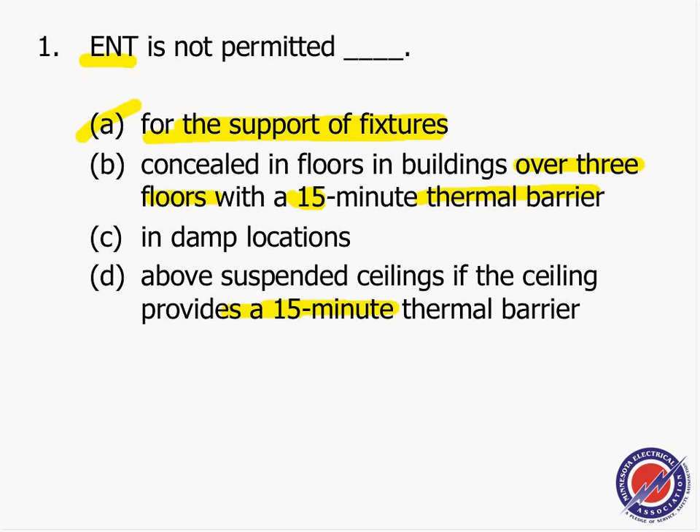ENT is not rated. Our answer for this one for support of fixture - it can't be supporting fixtures. You install it concealed over 3-story building, if you conceal it with a 15-minute thermal barrier in location above suspended ceiling with 15 minutes, everything is okay except you can't use it to support the fixture.

Stop me at any time if I'm going too fast. ENT is not permitted in theaters because it produces smoke if the system is medium voltage, and direct burial is not listed.

Moving on to the maximum number of bends in ENT - for all conduits, the maximum number of bends is 360. It must be fastened with... our answer for this one from the code is 3 feet of every termination.

It is not true - emphasize the word 'not' - that aluminum rigid metal conduit... our answer, remember it's negative, it's not true, is easy to thread and B.

This is not my answer for that one. My answer is B, as a matter of fact, because of not thread - is excellent for underground installation.

That's a kind of negative response, guys. Aluminum and underground are not a good combination. Aluminum conduits are not meant to be installed underground because of corrosion, a highly corrosive environment.

Moving on - running threads, are they permitted to be used in rigid metal conduits? For running threads, our answer is none of the above. Get confused probably with the word nipples here.

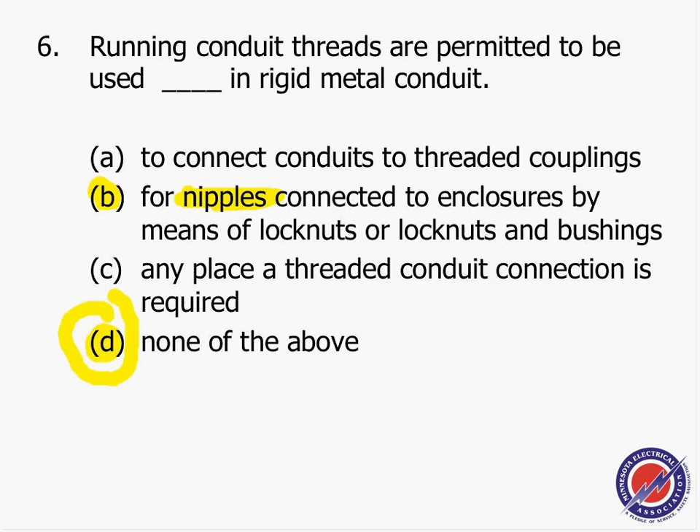How many of you answered B? Anybody remember? How many of you have answered B? There's a few of you. Answer question B.

The confusion is because sometimes we use it as a nipple because you can get them tight between the enclosures. Let me check - when I get your answers, if you answered B, I will give you credit for that. But generally speaking, you don't use it.

There's a special application where with certain lock nuts you might be able to use it between two conduits. Here's conduit 1, conduit 2, and you put it right here between the two conduits. So I'll check who gets B and give you credit.

Okay, number 7. Our answer is 10, and it says horizontal runs not through framing of 1/2 and 3/4 rigid conduit must be supported every 10 feet. That's straightforward from the table.

For 8, our answer was 5. The structural members do not permit EMT support to be at the prescribed distance from terminal. It can be secured within 5 feet - not 3 feet. If you can't support it within the termination distance, you can go all the way up to 5 feet if, because of the structural members, you can't support it.

Straight horizontal runs of 3-inch rigid conduit with threaded couplings must be supported at intervals of not more than 20 feet. This is bell condition, guys - straight horizontal runs and so forth - so you can go all the way up to 20 feet.

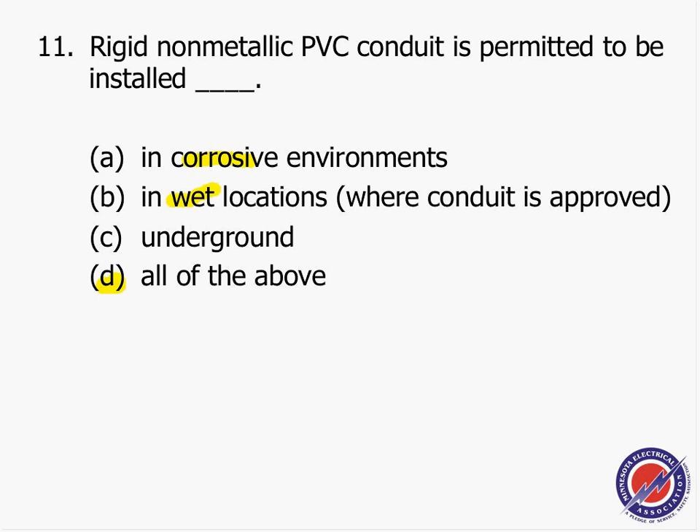11, our answer was 'all.' PVC is the king of kings when it comes to corrosive environments, especially corrosive environment with location underground - bring it on, no problem.

Schedule 80, guys - the key point is physical damage. So Schedule 80 is permitted to be used for physical damage, not fire-resistant places of assembly, not hazardous location, not to support fixtures. It's meant not for these, but for physical protection - not severe physical protection, but physical protection - you should be able to use Schedule 80.

13, our answer for that one was B. Support must be spaced not over 6 feet.

Rigid conduit, rigid non-metallic conduit, every 6 feet for that one from the table. Number 14, my friends, EMT. EMT is not, I can't emphasize the word not here, permitted to be installed and subject to physical damage. I know a lot of you guys think EMT can protect you, but EMT is not your conduit of choice, especially if it's severe physical damage.

Severe physical damage, not in hazardous location, support luminaires for any of the purposes listed above. So for 14, our answer is all of the above. But it confuses the physical damage, no hazardous location, there is some exception, support fixture, no. So that's 14, now 15.

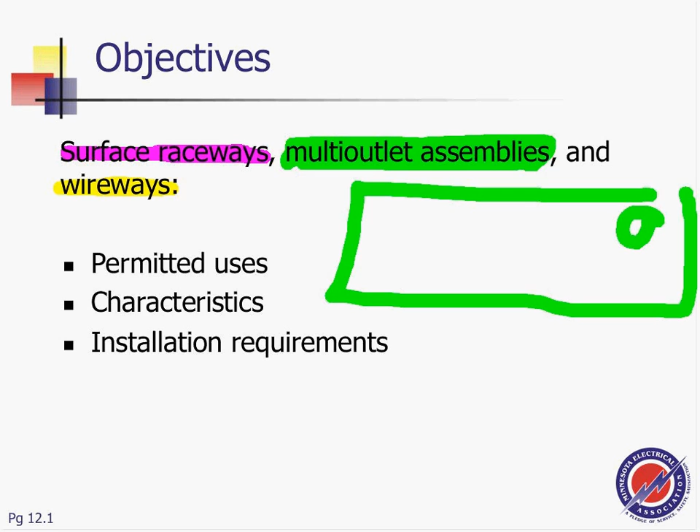Multi-outlet assembly in offices, or a concentration of receptacles where there's a lot of loads concentrated in one area. You buy a multi-outlet assembly with a certain length, install it, hardwire it, and put it in one place for equipment to be plugged in. That could be a wiring choice for offices, computer lab areas, and things like that. So that's a multi-outlet assembly.

Again, the difference with multi-outlet assembly is it has the devices housed in it. A lot of them are hardwired, pre-wired by manufacturer. You buy a certain length, either you come in as or you can hardwire them. It gives a concentration of receptacles in a certain area for a lab, if you have equipment you need to plug in everywhere, or in an office environment where they have a lot of receptacles in a cubicle, and so forth.

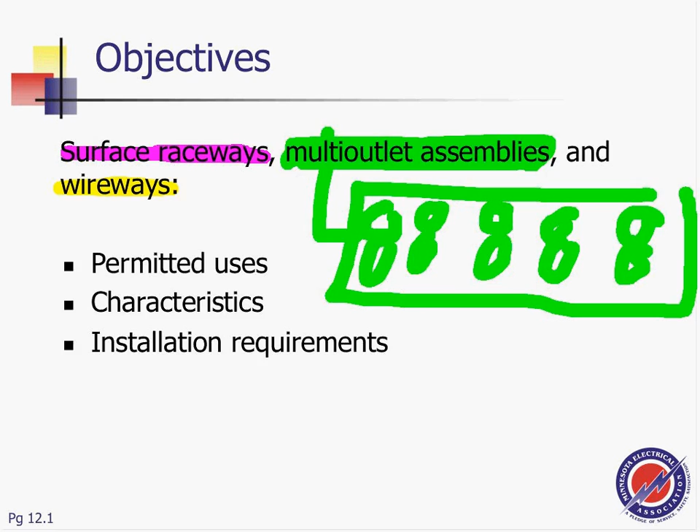That's basically what we're going to be discussing tonight: wireways, surface raceways, the difference between them, multi-outlet assembly, and so forth. Before we head on, my first conduit of choice is going to be talking about wireways.

For wireways, I'm going to do two things. One, I'm going to go over a few slides here, and then I'm going to jump into the code and go over a couple of things also in that particular article for wireways. So what can come -- like everything else, you can buy them metallic and non-metallic.

If I am to ask you, Eric, one thing that you learned from all these conduits: if you have a metallic conduit, it's not a good choice in highly corrosive environment. If you need to guess, if you have a highly corrosive environment, your choice number one is non-metallic. So that's kind of always in my mind -- where should I use non-metallic versus metallic? It's really basically one factor: highly corrosive or non-highly corrosive. Don't put them in any other location.

So, wireways -- here's the definition. It's a sheet metal raceway, hinged. Here's the key point: the hinged or removable cover. It identifies the wireway for housing -- look what it's housing and protecting, electrical wires and cables or cables. Conductors must be placed after the wireway has been installed. Very good, and I just say that you will install them.

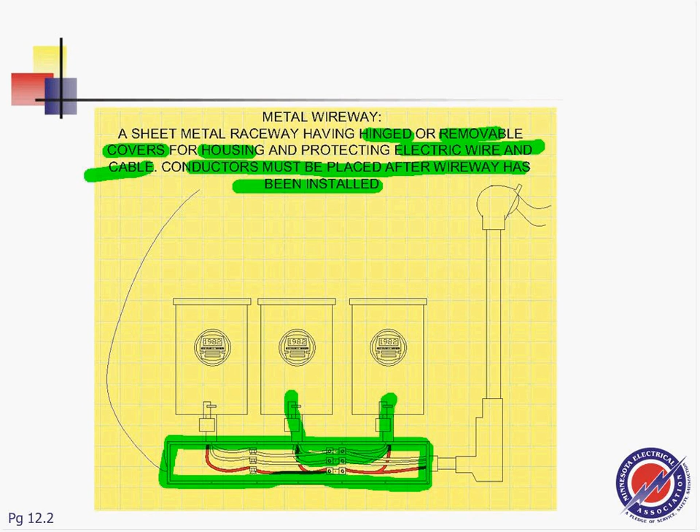This is a very good application, at least in my mind, when I think of wireways -- an extension, it's like a gutter, and I'm going to tell you the difference between a wireway and a gutter in a second. You bring the service over here to a wireway, and you use it to tap your conductors from the service entrance conductor coming into the building all the way to different meters and out to different locations in the building. That's a very ideal application, guys, for wireways. Any questions? How many of you guys have installed a wireway in this application?

Basically, a great application for a wireway where you can bring your service to it. It's used almost as a J box, where you can land your termination blocks and tap the service conductors, or the meters from the service conductors, the feeder from the service conductor to go to different parts of your building. Basically, that's a good application for it.

Anybody know the difference between a wireway and a gutter? Someone put you on the spot, because sometimes if you look at them you might say, 'well, that's a gutter.' That's kind of the confusion, guys. We'll get into that. The key points between wireways and gutters -- both of them are in the NEC code book.

The main difference is wireways come in standard sections -- you can have a 4x4, a 6x6, and as long as you want it to be. A wireway comes in standardized cross sections, 2x2, 4x4, and so forth, and then you can buy sections and build it as long as you want it to be. The major advantage is a cover, of course -- a removable or hinged cover.

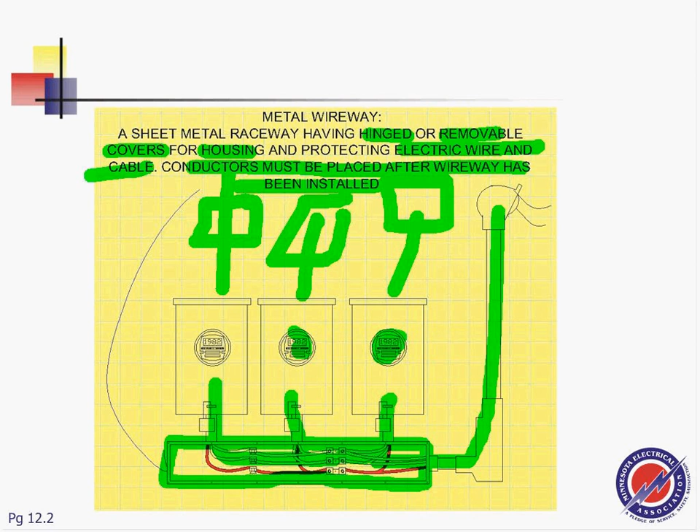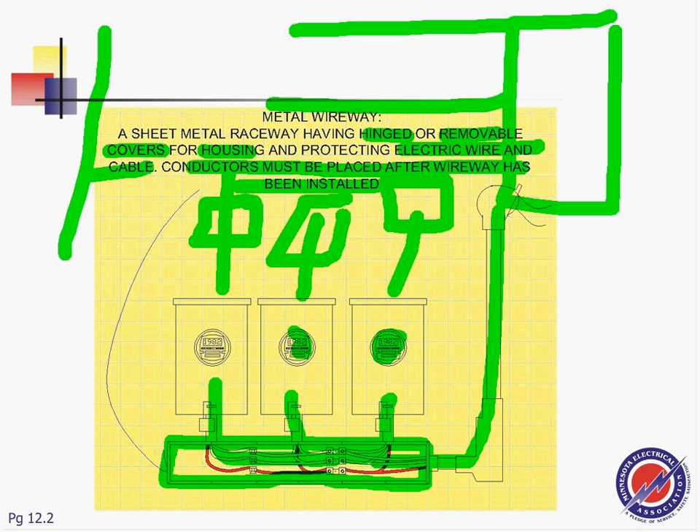Gutters are meant, guys, as an extension to the equipment. So they're customized, you can get them in dimension. They're meant to extend the panel to go from location. Here's panel number 1 - I'm going to bring a gutter right here with a foot and pull a feeder or a bus or whatever, to another panel. So it's an extension of the panels, and I'll show you in a second here. That's what a gutter means.

Also remember, gutters have a limitation of 30 feet, so you can't have a gutter longer than that. 30 feet is a lot to extend a panel, an external panel. So that's it. They don't come in standardized shapes - it's custom designed. You can buy it 4 feet by 4 feet if you want, with a limitation of 30 feet. But those smaller size guys, they look alike, they almost look alike. Any question guys about that? Look at the gutters in a second here.

Any question? Gutters versus the wireways, because they really look alike. Wireways versus raceways - I can't emphasize the word enough, guys. Wireways, most of the time, have a hinged or removable cover, easy to remove. Raceways - most raceways have a cover that you can remove too. But really, wireways versus raceways: wireways come in standardized cross sections, squares. Raceways, surface raceways, can come in any shape you want, also standardized but different shapes than square. And also, wireways are meant, as I said, to house and protect electrical conductors between equipment.

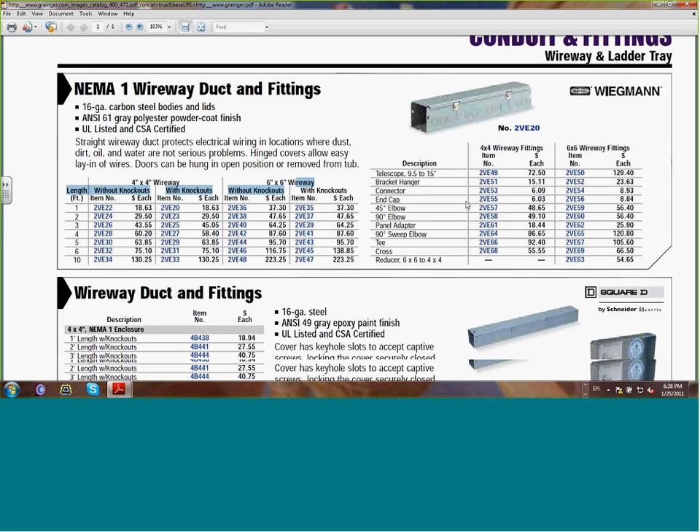Here's a link that you can look at, 4x4 - this is a 4x4 wireway. So it comes in different standards. I can see how they're all square: 4x4, 6x6 way, with fittings and angles and all the hardware that comes with it.

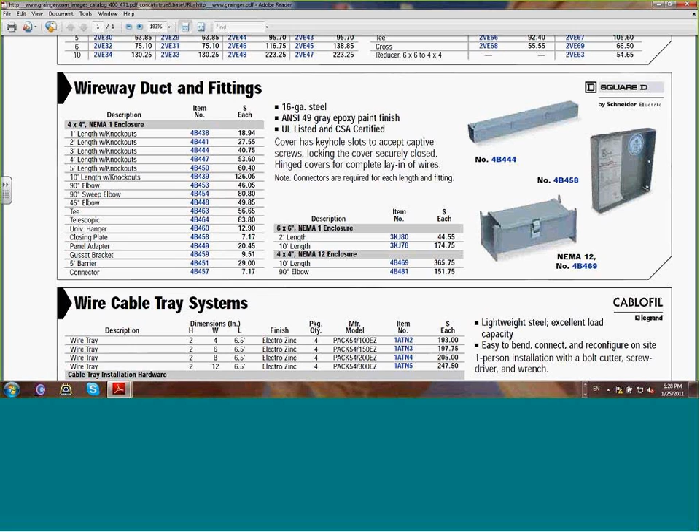Here's 4x4 - this is a Square D, different manufacturers. The bottoms are cable tray, but these are basically duct and fittings. The length they come in is from 1 foot - look at that - all the way up to 10 lengths, with knockouts or without knockouts. So you can see the lengths available and all the hardware that comes with it. That's a good example, if you haven't seen it - I'm sure a lot of you guys have, especially the first one.

And the second, these are your wireways with the items and fittings that you can get. These are 4x4, and you can get them in multiple sizes. So that's basically just a quick run of wireway. Any questions before we move into more things about wireways?

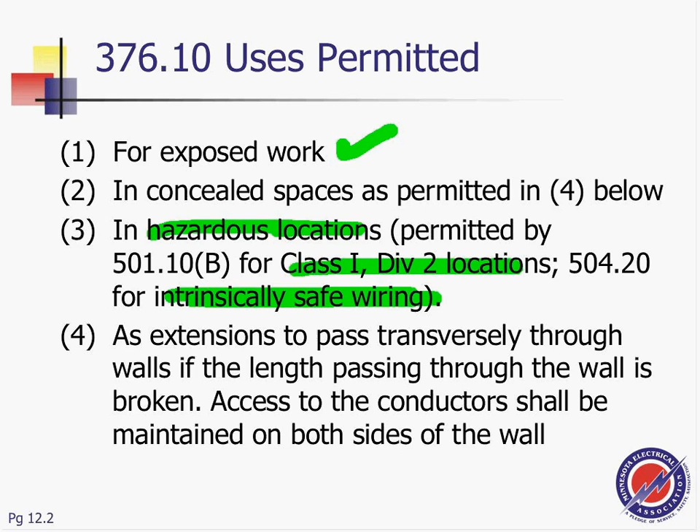Extension to pass. Now most of them are exposed, guys, but they can conceal. Look at what the concealing involves. If you were to conceal it, that's kind of interesting.

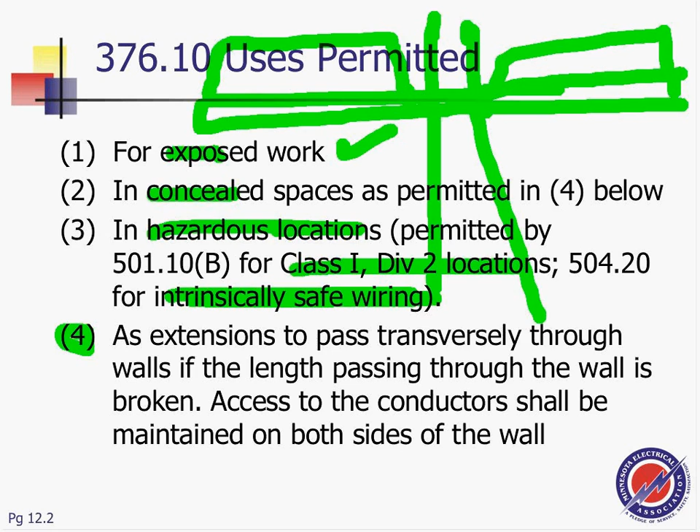Extension to pass transversely through the wall. If the wireway passes through the wall, access to the conductor shall be maintained on both sides of the wall. So you can conceal a wireway, no problem. Here's my wall over here. I want to bring an unbroken piece of the wireway through the wall, but I have to maintain access on both sides, guys. I have to be able to open the hinged door of the wireway on both sides, if that makes sense. So an unbroken part of the wireway can go through the wall, but you must maintain access to the wires on both sides of the wall.

Any questions about that? But for the most part, it is an exposed wiring system. That's why we like it. Exposed - it's got a cover, you mount it on the wall, you put your conductor on it, and you cover it. You cover it and you go. Then you tap it and do whatever you want to do with it. Any comments about that one?

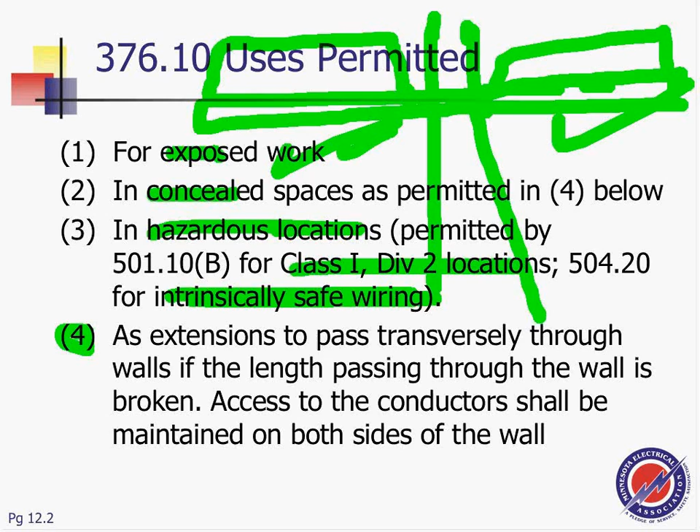Any question, guys? So, a couple of applications for wireways. Here's my probable use.

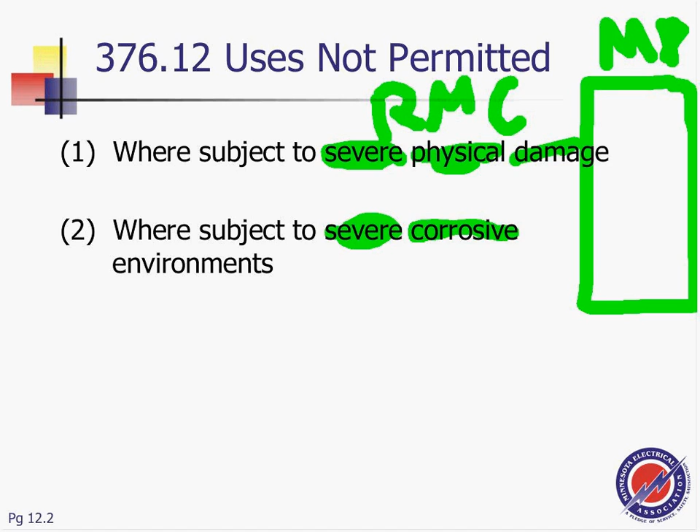Here's my main panel here. So you come up with a feeder here, guys, and bring the feeder to a wireway, and I can feed my disconnects here and feed multiple motors. That's a good application for it. See how I put my disconnect, I'm feeding multiple motors from it, I'm tapping the feeder - either you tap the feeder or you pull conductors for this. So this is my wireway. You tap one feeder, or you bring multiple feeders, guys. That's the application for it.

Anybody install it this way, guys? Anybody install a wireway in this application? Nobody? Somebody install a wireway in this application? No?

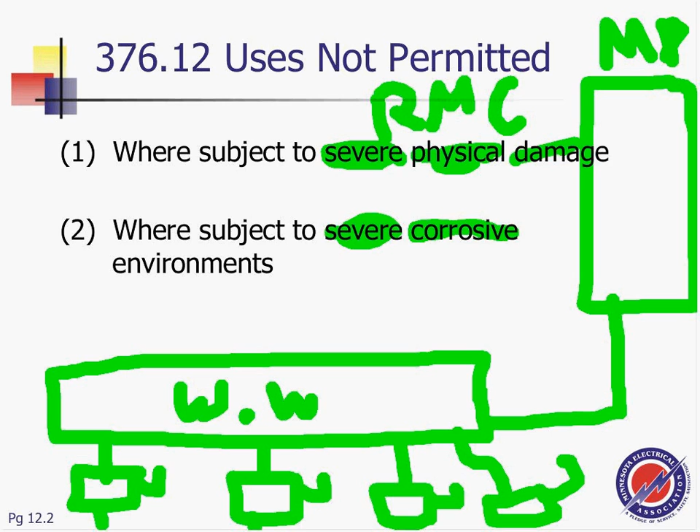Another good application, I think, for a wireway - use a gutter here too. You can use a gutter all the way from the panel all the way to the feeders, but that's a standard use of the wireways.

Size of the conductor - wireways, so we've got the metallic wireways spaces. Okay. The question, JC, my friend, would be, can I install 500 kcmil in a wireway? Maybe. The answer is, the maximum wire size permitted in a wireway must be marked on the wireway itself. So when you buy a wireway, they mark it with the largest size conductor, let's say 4/0.

This is a single standalone conductor. Maximum size conductor permitted in a wireway is marked on the wireway. So you will be marking the size on the wireway. I'll tell you, they don't want you to go there - if you see 4/0 is the largest, they don't want you to go with 500 kcmil. So very important, mark the size on the wireway.

And so, number of conductors and ampacity - this is very interesting, and I want you guys to wake up if you are sleeping now.

Number of conductors, ampacity, cross-section area, and adjustment factor. Now, the maximum number of conductors permitted in a wireway is 20% of the cross-section area of the wireway.

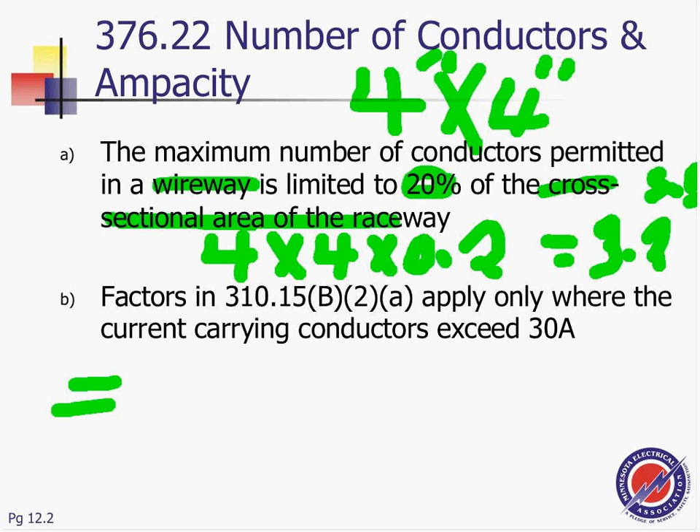We're gonna go find the cross-sectional area of the conductor. So if I want to find how many number 12 conductors, THHN, I can fit in a wireway like this, all we have to do is go to Chapter 9 of the code, to Table 5. Table number 5 will get you the cross-sectional area of the conductor.

So let's do the example. I have a cross-sectional area from Table 5, THHN conductor - I emphasize the word THHN - and it's page 678. I assume you guys have your code book with you. This is page 678, Table 5.

If you look right in the middle of Table 5, you're going to see THHN. And if you look at the last column, I need the THHN - actually not in the middle, right at the top. The top of the page, you're going to find that number 12 cross-sectional area is 0.0133. This is the cross-sectional area of one conductor, number 12. Ever get that one?

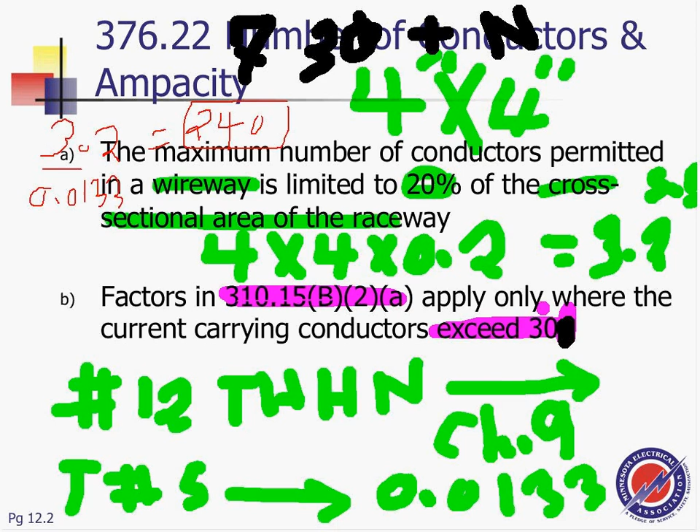Anything else about this? So I hope I got the message here. 30, even though you still need 30 hots, or 30 hots and a neutral. My calculation was based on 30 hots and a neutral, a common neutral, which I counted as a hot because it's feeding harmonics, and this is when we count it. Expect this one in your exam.

Insulated conductors. As you enter your insulated conductors, guys, let me see, do I have my picture? You need the wireway to be sized appropriately for the bending radius of the conductors. If you use an insulated conductor, which 99.9% of the time we do, and you bring it to a conduit like this, you have to pay attention to the bending radius of the cable. And which table do we go to?

Table 312.6(A). If you go to this particular table, it will tell you the radius. If you bring a 500 kcm, big boys here, to this wireway, you better maintain a radius of 6 inches. That would be basically the height of the wireway, so basically the radius to be able to bend the conduit, to be able to bend the cable, with a radius that does not violate the smallest radius that you can bend a conduit with.

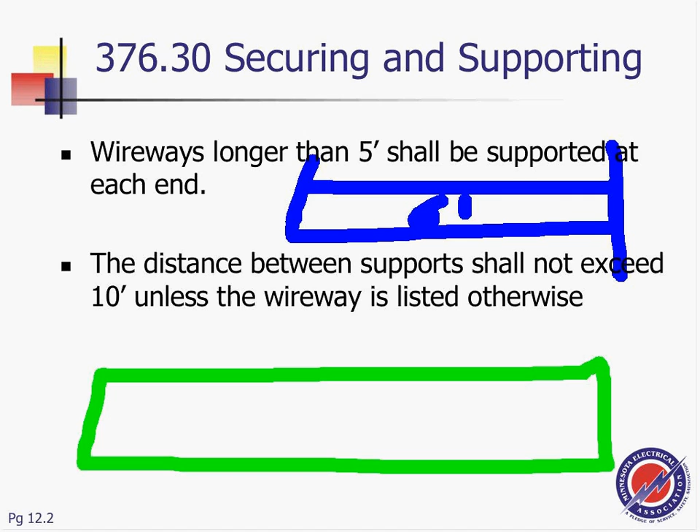The support shall not exceed 10 feet unless the wireway is listed for that. So for the most part, guys, we're going to be supporting the conduit at 10 feet intervals. So from here to here is 10 feet, and then from here to the termination, say it's terminated in a box, this is 5 feet. From here to here is another 5 feet. Makes sense? 5, 10, 10.

Distance between supports shall not exceed 10 feet unless the wireway is listed for that. So you go 5 feet from the termination, then 10, 10. So definitely we're supporting the wireways. We support one at each end, and intervals not exceeding 5 feet, or individual lengths longer than 5 feet at each end, unless the wireway is supported such that the distance between supports shall not exceed 10 feet. The distance between the supports shall not exceed 10 feet.

Okay, so are there any questions, guys? Any comments? And you see what we have here.

So that's basically our support. They don't want you to exceed more than 10 feet if they're listed, no matter what. The distance between supports shall not exceed 10 feet, no matter what. And at intervals not exceeding 5 feet for individual lengths longer than 5 feet, at each end point, unless listed, every 5 feet. So if it's more than 5 feet, you go up to 10 feet between the supports. Okay, that's supporting my conduits.

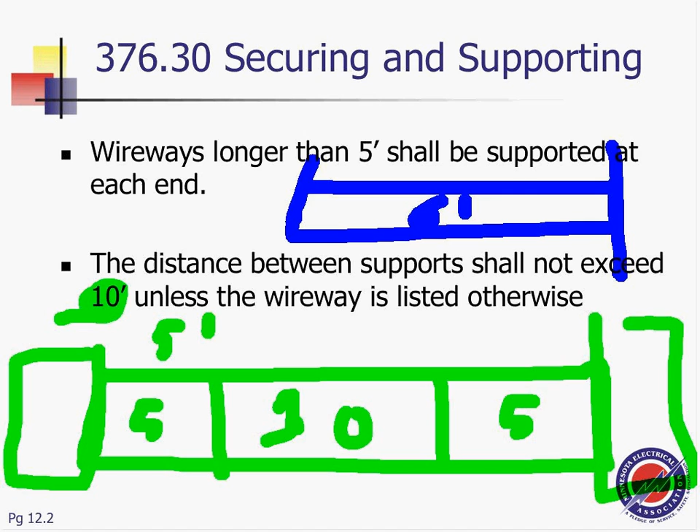Vertical support, guys. The vertical runs of wireway shall be securely supported at intervals not exceeding 15 feet and shall not have more than one joint between the supports. So if that's horizontal, if it's going vertical, they allow you to go 15 feet between supports, and not have more than one joint between the supports. Every wireway section shall be securely fastened together to provide a rigid assembly. So 10 feet if it's horizontal, 15 feet if it's vertical.

And the question is, now, can you install them supporting this and that? Of course you can. So that...

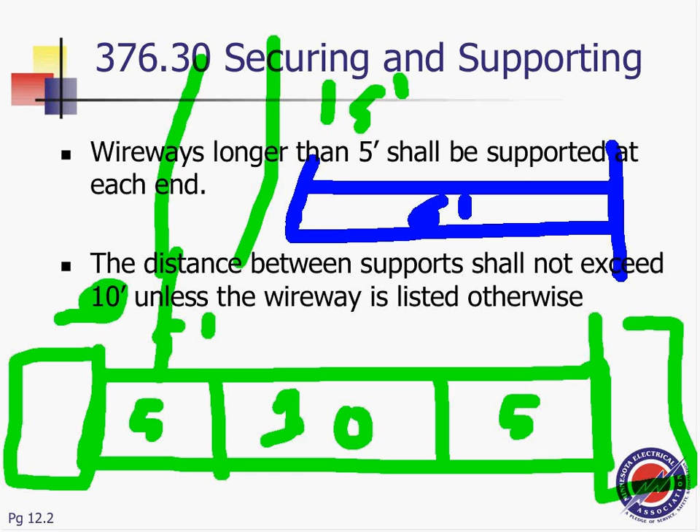Wireway, my splices and taps. Interesting topic, splices and taps. Can I splice in a wireway? Let me ask you guys, can you splice in a wireway? I say we can't splice in a wireway. Can we splice in a wireway, tap in a wireway, splice? Of course we can. That's one of the major advantages, guys, of having the wireways. You can use them as a J-box or a pull box. That's the advantage of it.

So splices shall be permitted within a wireway, provided they are accessible. And almost all wireways, guys, are accessible because wireways have hinged doors or removable doors. But when you do your wireway, my friend Eric, here's my wireway, and if you did your splices here, here's all the conductors coming in and you're splicing, and this conductor splices with this, and this splices and goes over, and all these splices going from different directions from that one, they want you to not fill more than 75% of its area at that point.

The conductor, including splices and taps, shall not fill the wireway to more than 75%. The same rule, JC, my friend, is for panels. That rule of 75%, you guys are going to see on your journeyman exam too. It applies to panels, switch boards, gears, wireways, and all these. As you splice, you can't fill more than 75% of the area where the splice is located, including the cables that's going through the splice. There might be a cable coming from here that's not spliced, just going all the way up.

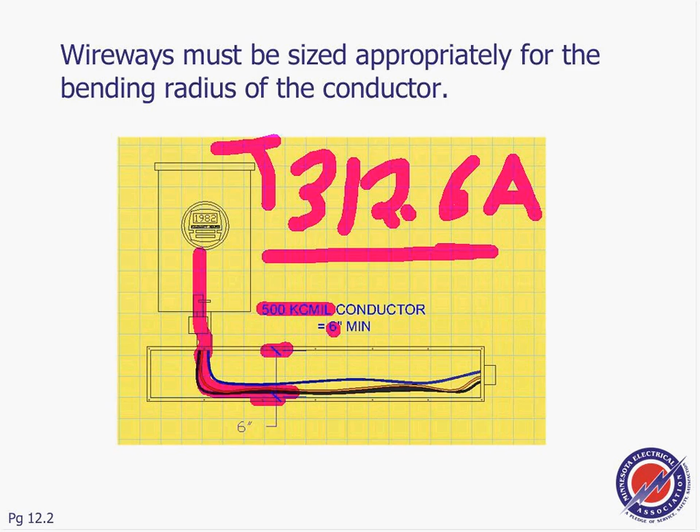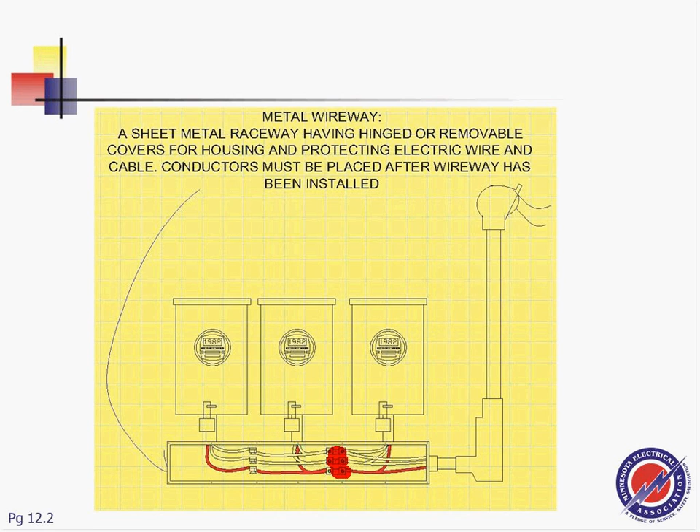Here you go - the power blocks. They want the power blocks to be completely fully insulated. So if I open the hinged door and look at them, nothing - everything is completely insulated, whether the cover is open or closed. That's very important. In 2008 they added this rule, and I think it's a good safety rule.

For distribution blocks, instead of tapping, you can put power distribution blocks, but they have to be fully isolated. Dead ends shall be closed at the end of the run.

You can't just keep a big hole open here. You have to close the back of the wireway as you go through, then it'll be closed.

Extending from metal wireways - you can have a wireway and extend from it with PVC. You can tap PVC, rigid, EMT, you name it. These are permitted with cord. You can even use cord or any wiring method from Chapter 4 that includes means for an equipment grounding conductor. I can't emphasize enough - you need an equipment grounding conductor.

So can I tap from the wireway with rigid? No problem. EMT, no problem. PVC, no problem - but you have to have a means.

If it's non-metallic, like PVC, you have to have somewhere - somehow a place where you can tie your equipment grounding conductor. Say that was PVC right here - I have to bring my equipment grounding conductor and terminate it to ground the wireway.

If you do EMT, no problem - the lock nuts will get you the grounding.

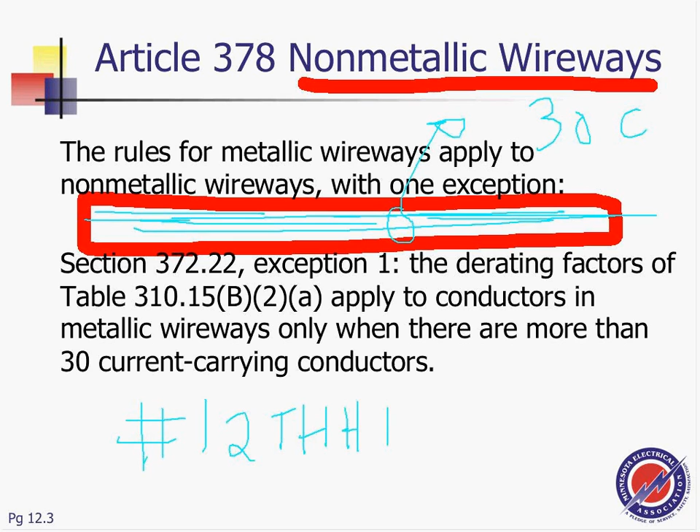Then I'm going to go to table 310, the 90-degree column, because I want to do it that way. I know that number 12 will give me 30 amps for derating. So let's take the 30 amps.

You multiply it by the derating factor from table 310.15(B)(2). If you go to that table for 30 conductors, you're going to find 0.45 as the derate factor. That gives you 0.45 times 30, which equals 13.5 amps.

So from the conductor, you only get 13.5 amps. That's a loss. And if you use bigger conductors, guys, for motors, you're basically dealing with this same issue.

Because if it's metallic, up to 30 conductors, you don't have to derate. So if this conduit were metallic, I could get from number 12, as you all know, 20 amps non-continuous, no problem, or 16 amps if it's a continuous load like lighting.

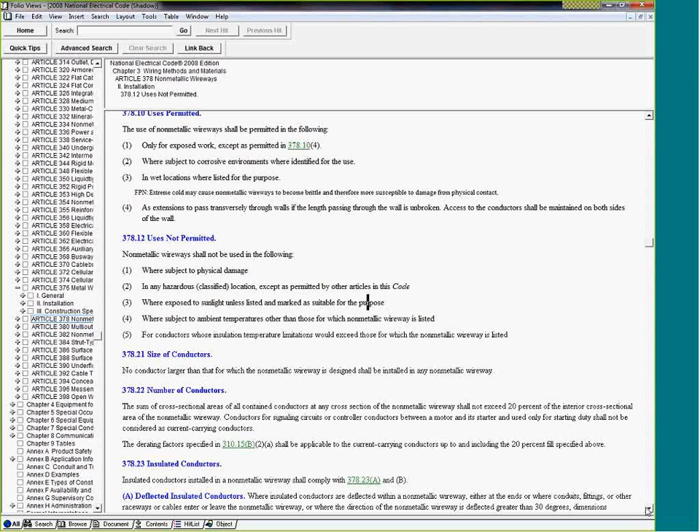For location, going through walls - if it's not in a section prohibiting it, no problem, bring it on. Can't use these where exposed to physical damage, hazardous locations, or sunlight if not listed for it, or for ambient temperature higher than what's rated, or conductor insulation higher than what's rated.

The rule, guys, for the size of conductor - same rule applies for the number of conductors. How much can I fill? You can fill only 20% of this conduit.

Derating - you start the derate from the get-go. For insulated conductors, you have to allow for friction. If you're using a pull box, you have to apply the same rules as the pull box.

Securing and supporting - you have to support every 3 feet, and if it's listed, every 10 feet. So the rule is every 3 feet you support, unless it's listed for support more than 3 feet - in no case shall the support be more than 10 feet.

I don't know if I made myself clear, guys. In metallic wiring, it was all 5 feet, but if it's listed, you can go up to 10. For vertical support, you can go up to 4 feet - they give you 1 foot.

Expansion fitting - this isn't new for low voltage. Every time you have non-metallic, you have to pay attention to expansion fitting, since it's a temperature difference issue.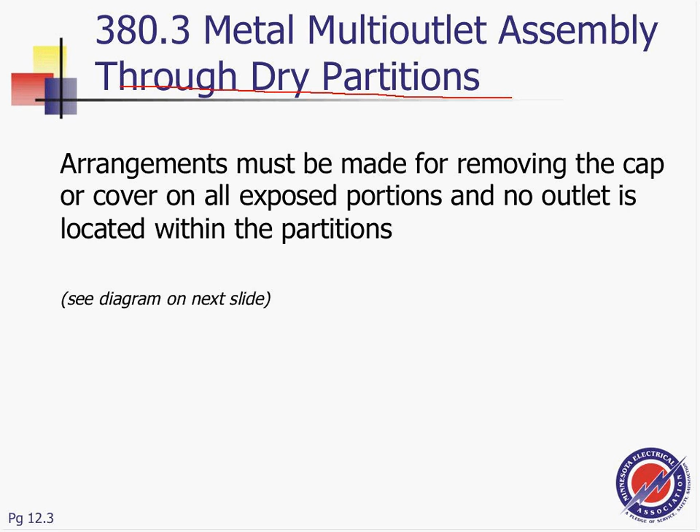The thing that we talked about, guys, is tapping and splicing and moving between equipment and so forth. A few things I mentioned—I showed you guys the multi-outlet assembly. We're going to talk about dry location, multi-outlet assembly through a dry partition. Yes, no problem. Arrangement must be made for removing the cap or cover on all exposed portions.

Here's a multi-outlet assembly. Can I make this multi-outlet assembly, guys, go through a wall right here? No problem, as long as I can open the cover on this side and also open the cover on this side. This section right here is an unbroken section. So that's basically what they're saying.

Multi-outlet assemblies are, as you can see, wires and devices. You can have different sections for high voltage and low voltage, but for the most part it's devices and wires used. Where you use it—concentration on places with a lot of power, like labs and so forth.

So that's basically my multi-outlet assembly. Any question about the multi-outlet assembly? It's not a whole lot of wiring system. You get the multi-outlet assembly and you can mount it horizontal, vertical, or at any angle—as a matter of fact, in places where you need a lot of power, a concentration of power.

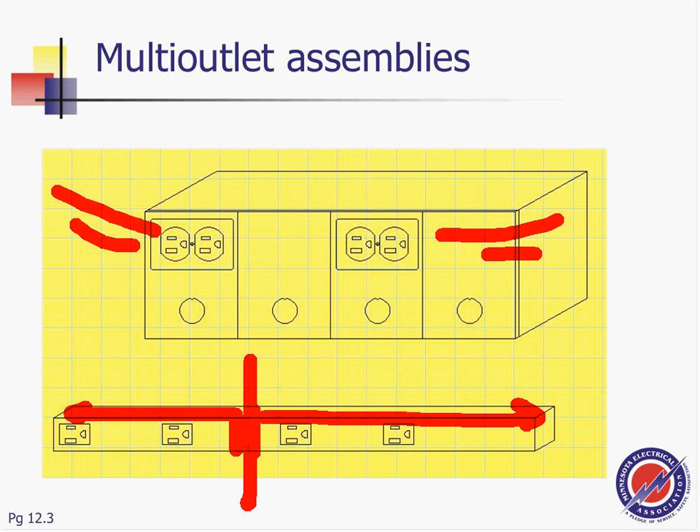Okay, so moving on from the multi-outlet assembly—it's not like a channel. It's devices and wires, but where you need it on top of a lab is a good application for it. Workshops, offices where you have a lot of things plugged in—you can carry it or plug it in. Now moving all the way to channel raceways.

We'll talk about the rest of the ones we're going to go to. We move from wireways, multi-channel, and we're going to go to metal wireways. So, strut-type channel ways—how do you install the strut-type channel way? Strut-type channel way.

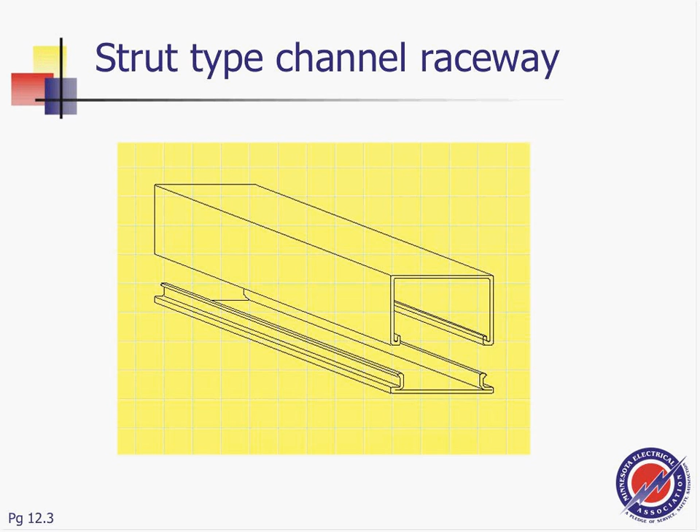It's a special type of wireway. As you can see, you can mount it to the top, and you can put conductors in it. Let me just read the definition: strut type channel raceway is a metallic raceway mounted to the surface or suspended, in which conductors or cables are laid in place after the raceway has been installed.

So you have a structural ceiling, and your ceiling is right in here, and your decking and all this good stuff is coming in here. That's a good application where you can install your strut channel right in here and pull your conductors from point A to point B. That's basically a good application for that raceway.

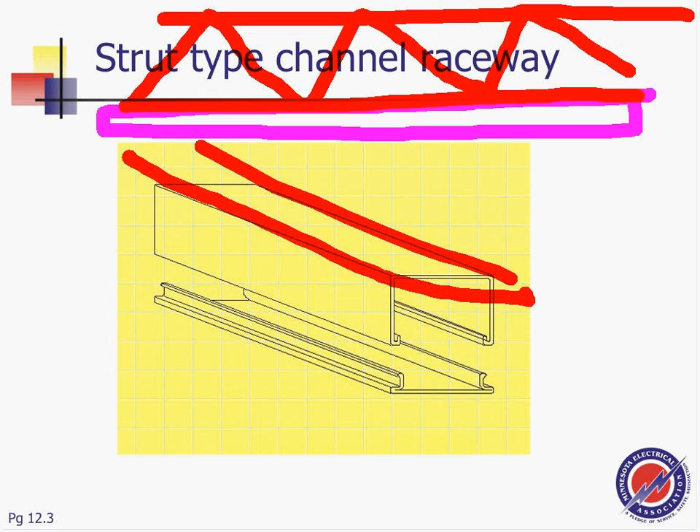The wiring system is permitted for exposed dry locations, or subject to corrosive vapors where protected by suitable finish. Every time you put metallic raceway in any area, it's not your choice, but if you need it for physical protection, then you have the word 'suitable finish' - so you have to protect it from corrosion. If you protect it from corrosion, no problem. There's a voltage limitation: 600 volts or less. That's a lot of voltage, but still not medium voltage.

And power pole - you can see the power poles coming from the top to the bottom, bringing power from the ceiling down. You can use it in hazardous locations as permitted, only as permitted, and as extension of unbroken length through walls. You can extend it through walls and use ferrous channel raceways and fittings protected from corrosion by enamel, only indoor. So basically, if you use this conduit in a place where there's some type of corrosion, because it's metallic, you have to provide some type of protection for it. That's about the uses.

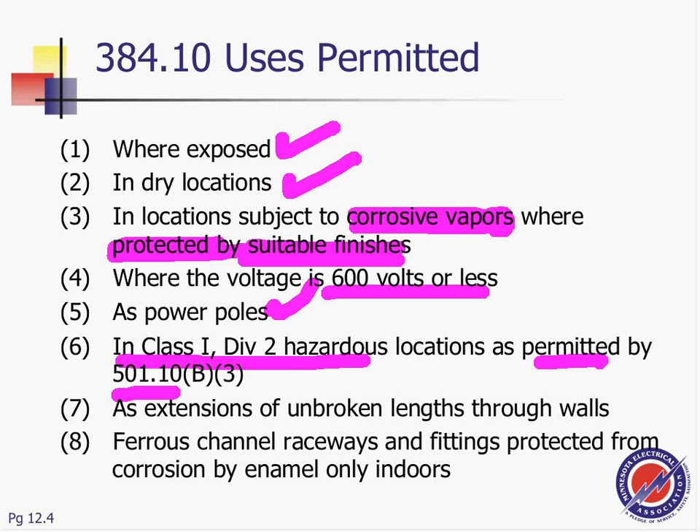Mostly indoor, mostly. I've never installed them, but I've seen some of them in factories and so forth, shops, on the roof. Okay, so that's basically the location for that raceway.

So your use is permitted, not permitted - now the conductor, same thing guys. The largest conductor that you can install in this conduit, 600 kcmil for example - I'm just throwing this number here - it has to be listed for that particular raceway. Like every other raceway, you need to determine the largest conductor that you can install in that conduit.

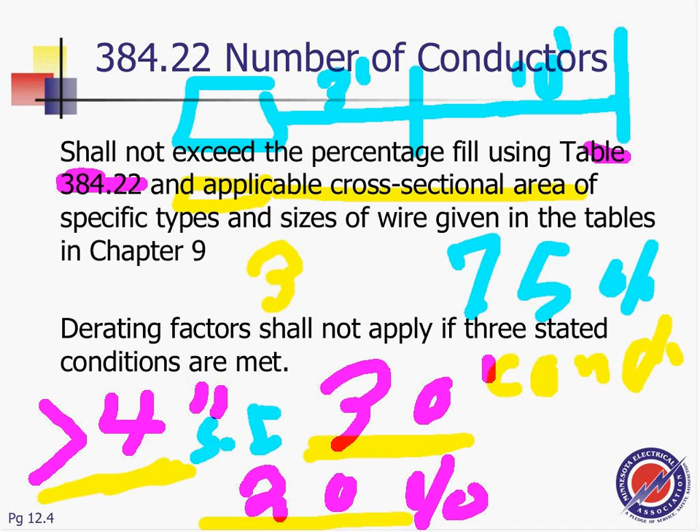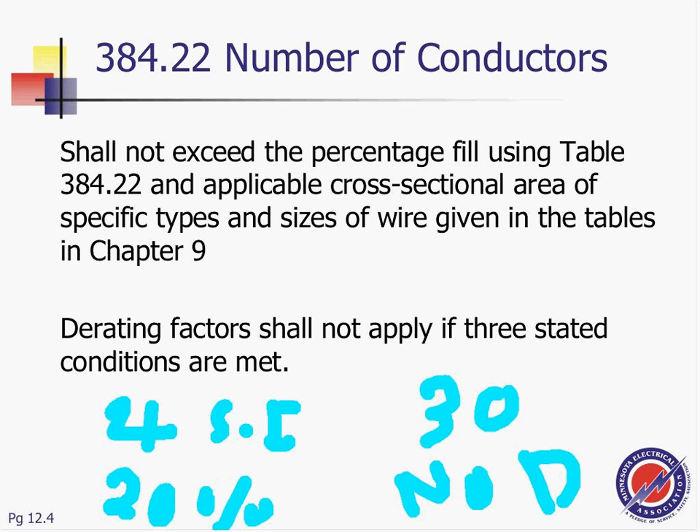Question about this? So to summarize, if it's more than 4 square inches cross-section, clear that one - the rule is if it's more than 4 square inches cross-section area and you fill it no more than 20%, and conductors are 30 or less, then no derating. Otherwise, you have to derate.

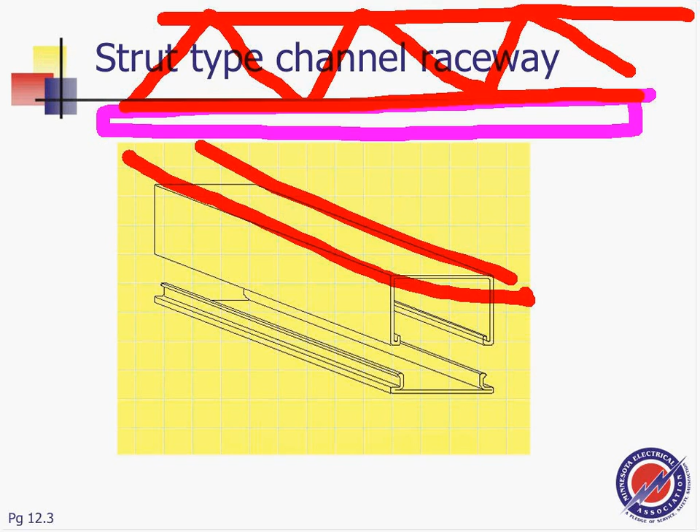Okay, that's basically about this. I'll give you my poll for that one and move on. Again, guys, would you use something like this in an industrial real application where you can pull conductors right under the decking, going with control conductors or wires from point A to point B? What's the alternative, Jacob, my friend, to this wiring?

The alternative of this wiring system is EMT. So what's the difference? A channel raceway like this can carry a lot of conductors compared to EMT - easier access for these conductors. So if you're working on a manufacturing floor where they keep changing the layout of the lighting system, that would be a good application for it. It's easy to access the conductors, add more, and so forth.

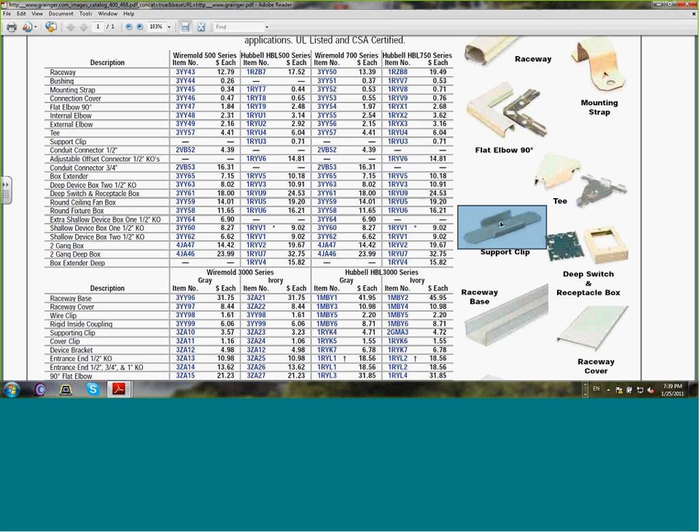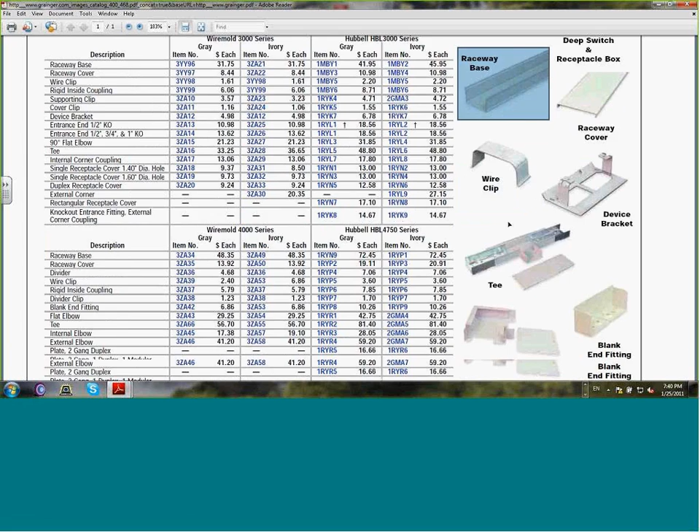What I bring to your attention is they come as a complete wiring system. So you can have a raceway, strap support, flat elbows, tees, support clips, a deep switch box and receptacle box, raceway base, and a whole lot of hardware that comes with it - external elbows, blanks, and so forth.

So I want your attention, guys. It's a whole complete wiring system, unlike the Wireways, which aren't meant to put devices in, but meant to put boxes with them, put devices, and take them all the way to the light and to the switch - a major change. I can use this as an EMT conduit or as a cable to take it to the light, from the light to the switch, from the switch to the receptacle. I can do a lot of branch circuits with it. So Raceways - you can see the different manufacturers and different series and so forth.

Just a quick show. Moving on, I have Grainger here. Here's another look, guys - you can go to Grainger and see there's a lot of these conduits and molds. Here's the Wiremold raceway. We have this one as 96 by 1.125 by 0.62 inches. Raceway locking hinges, cover, ivory, and all this good stuff.

You might also see what's recommended for you: boxes. They have other stuff as you can see, raceways, various sizes, and so forth, and all the hardware we just go through. I'm sure a lot of you guys have used them. Look at the boxes, the covers, everything that goes with them. It's not just a raceway - it's really a complete wiring system with its devices and so forth.

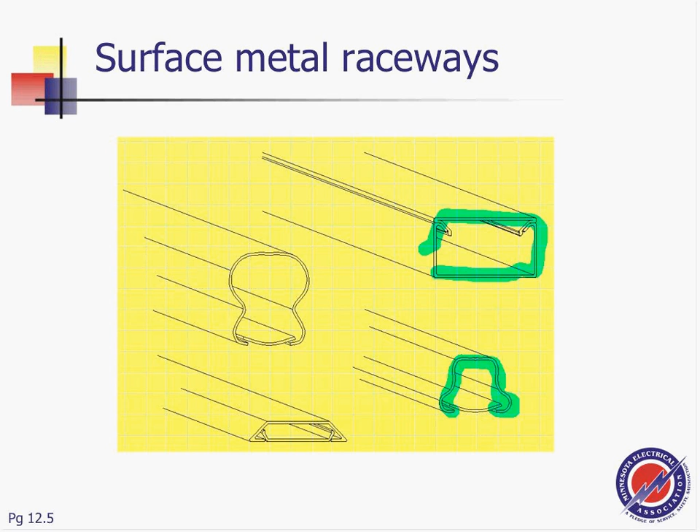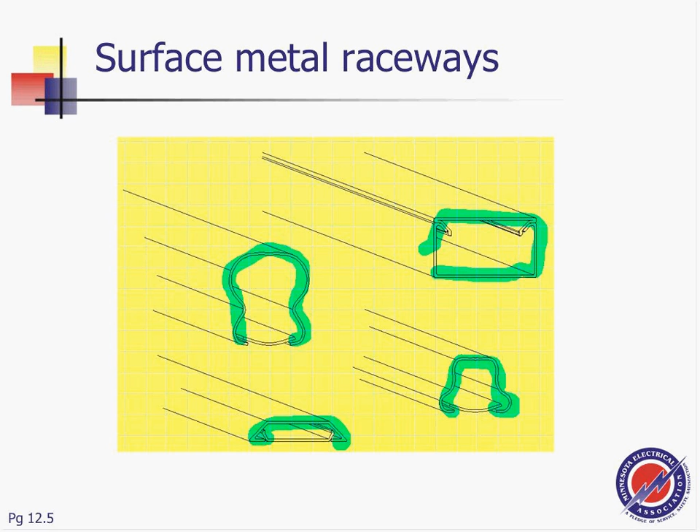Application where you remodel a lot - you can plug in, take them out, pull the conductors in them. A lot of them have a cover that you can remove, where you can have access to the conductors. Basically, where would I use them? Retrofit.

Retrofit is a good example where you don't want to use EMT exposed because it looks like crap. I hate using it in residential, but I've seen it used in residential where you go to a light in the ceiling because people are too lazy to dig through the sheetrock. They don't make holes in the sheetrock and pull the conductors through the walls. That's an application for them, I guess.

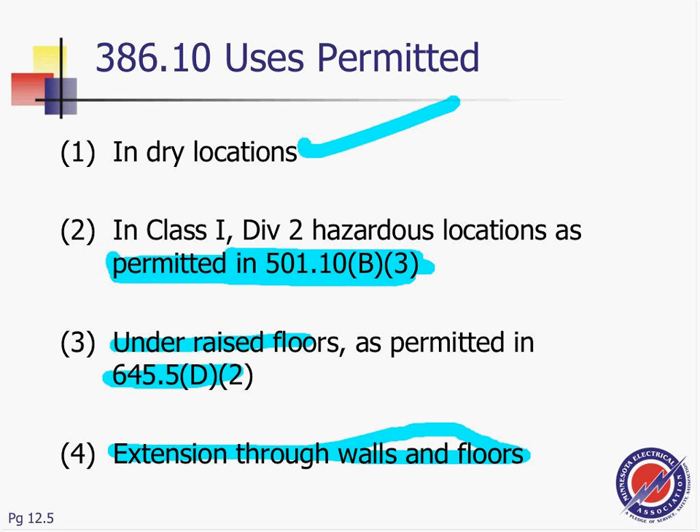When use is permitted, non-permitted - here you go: in dry location, in hazardous location - guys, I hate to use it in hazardous location, but there's always something that can be used in hazardous location with certain exceptions. It's permitted on or in raised floors per the article that talks about raised floors. Extension through walls and floors - no problem, as long as you maintain an unbroken part that goes through the wall. That part going through the wall or partition cannot be broken. Where can't I use it? So it's mainly for dry location, guys.

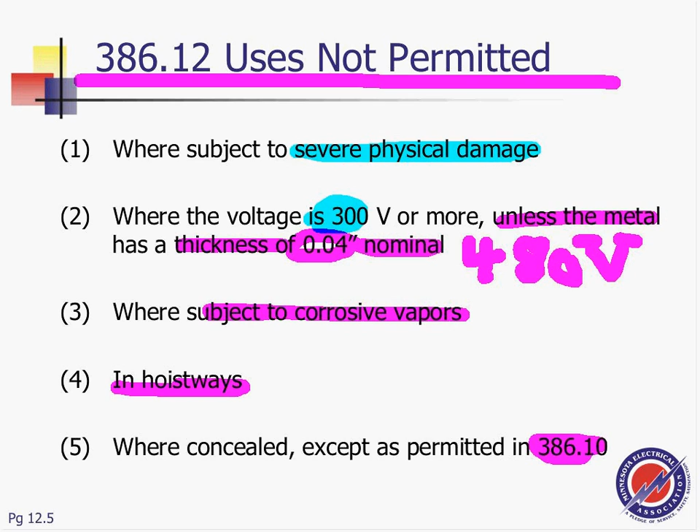Hoistway, no, or concealed, except this one tells you can go through a partition. So if my wireway is going through here to here, and I have my wall coming right in here, no problem, as long as this is non-broken, an unbroken part that goes through here. No problem then, you access the wires from this side and access from this side.

Any question, guys? Any questions about use of these wireways? This is used for retrofit and small sizes.

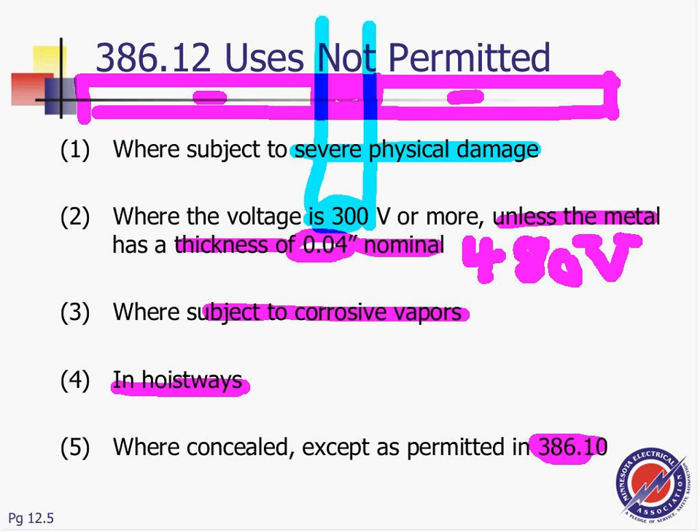So moving on to wireways, like every other raceway, guys, they always specify the largest conductor that you can install in that particular surface raceway. Surface raceways always specify the number of conductors and the largest conductor.

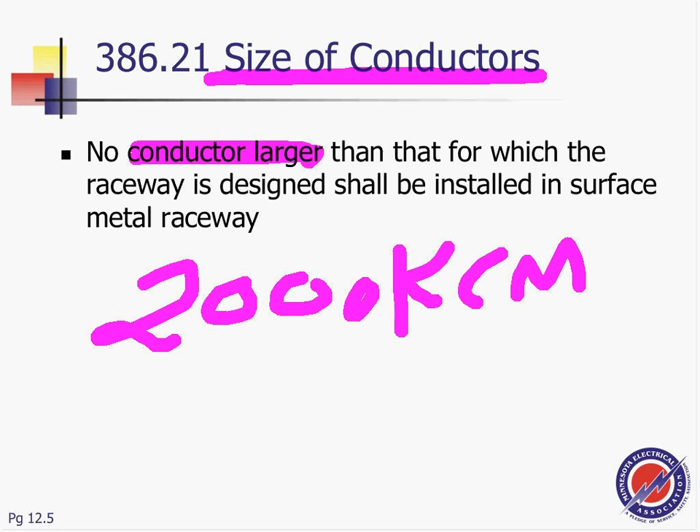So can I install 250 kcmil, 2000 kcmil? Well, if it's listed on it, then you can. If it doesn't list it, then you cannot install the largest conductor. Number of conductors shall not be greater than that number.

Here's a major difference, Joe, between a wireway and a surface raceway. A wireway, guys, is 20% fill, no else, done. For a raceway, it says look at the number for which the raceway is designed for. How many conductors can I fit in this raceway? It will not be greater than the number for which the raceway is designed.

So you go back to the manufacturer. So they ask, can I fill this conduit 50%, 60%? Well, if the manufacturer says so. And so basically, there is no 20% fill for a raceway. You can almost fill it all the way up.

Okay, so emphasize this. But then look at the catch-22. You can go as big as you want, but there's a catch-22. In order not to derate, the following conditions must apply. Number one, the same condition, guys: cross-section area has to be more than 4 square inches.

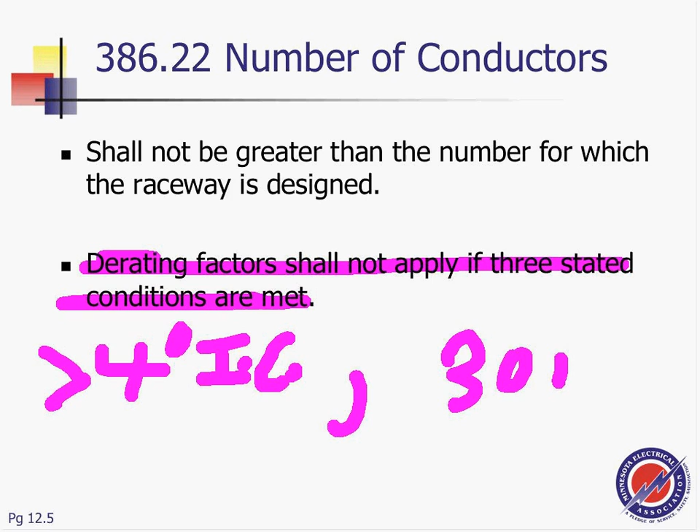Rule number one. Number two, you have to have 30 hot conductors or less. Number three, you can't fill more than 20%. So it's like treating the raceway as a wireway. If you apply the rules of a wireway on a raceway, then basically you don't have to derate. The advantage is I can carry 30 conductors now if I apply these rules, and I don't have to derate. If you have to apply the derating factor for less than 30, it defeats the purpose of using these rules.

So it's a good idea to adhere to these rules, even though you can carry more conductors than that. But if you have a bigger type of raceway, more than 2 by 2, that'll give you more than 4 square inches. And you limit the number of hots to 30 and don't fill more than 20%, then guess what? You don't have to derate.

Anything about these rules? Otherwise, you can fill them as much as the manufacturer says, but then you have to derate. This is a major change between raceways and wireways, metallic raceways and metallic wireways. Very interesting: no 20% on the raceways versus wireways will limit you to 20%.

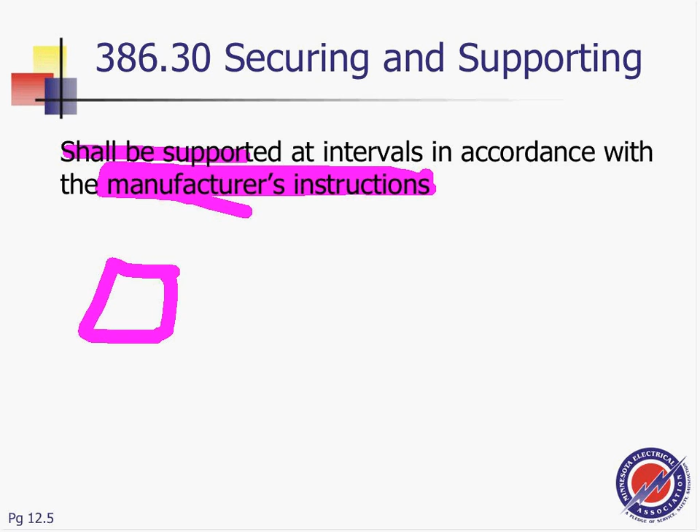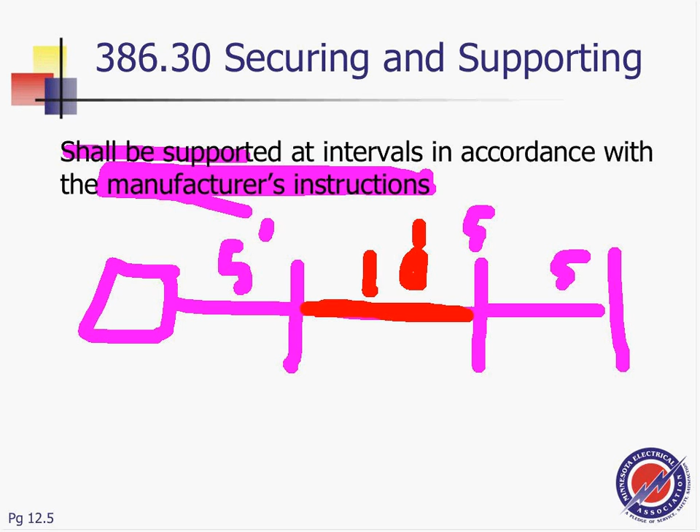You have to go see what the manufacturer's specification says. If you don't know, and you don't have the material, guys, apply the same rule we applied for wireways. So if we did 5 feet between supports and 10 feet, and you keep supporting every 5 feet, or only if it's listed higher than 5, we went for 10 feet support. That's basically support.

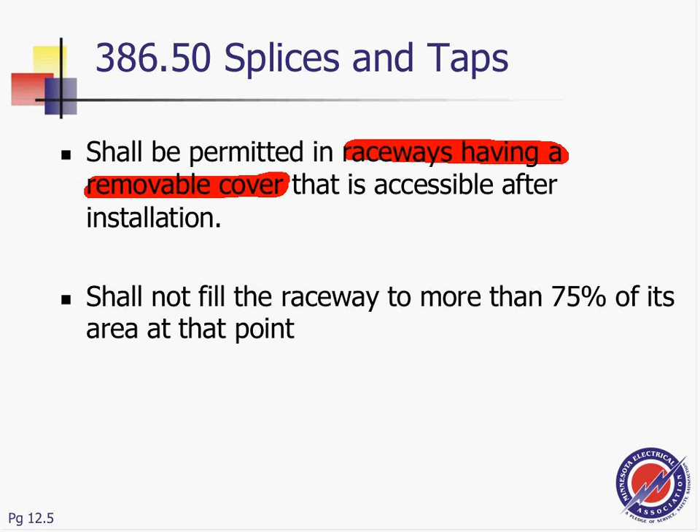A splice shall be permitted in raceways having a removable cover, only if the cover can be removed. Some of them have a removable cover, others don't. If they have a removable cover, then no problem, go ahead and splice. But if you splice, please don't go higher than 75% fill.

Sound familiar, guys? All the raceways we talked about tonight, they all have this magic 75% fill. They just want you to open it and not find a rat's nest in there with all these wire nuts and terminals and taps and tapes and everything else.

So can I splice and tap in a raceway? Yes, if it has a removable cover, because for taps you need access to your splices and taps. When we tap, what do we do? We put a junction box. But the advantage of these wireways and other raceways this time is you don't need a junction box, you can splice right into it.

So moving right in here, guys, bringing my conductors. I'm bringing conductor number 1 right in here, and splice it or tap it, and continue all the way. I want to tap it here and do another conductor. So I have a conduit going this way, I want to tap that phase through this conduit, no problem, bring it on, you tap from here and you go. That's kind of the advantage of this wireway, exactly like a gutter. No exceptions.

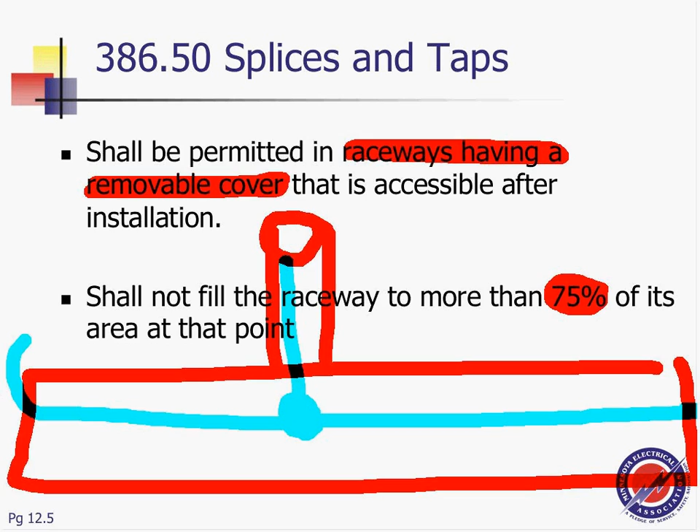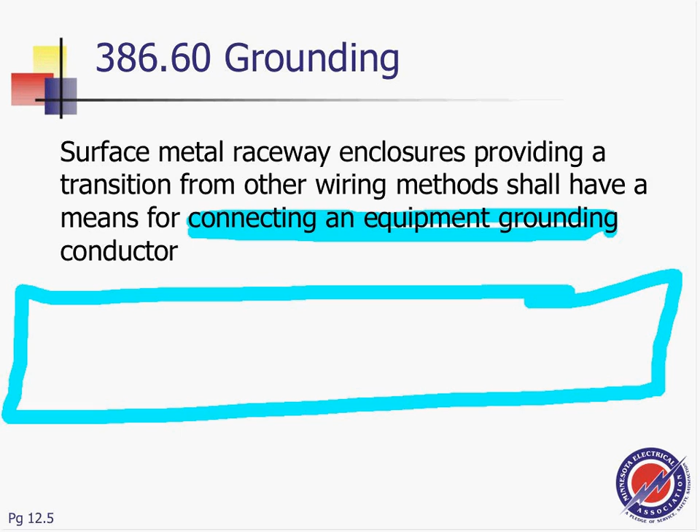Okay, moving on into grounding. Grounding, the enclosure, it's a surface metallic enclosure providing transition from other wiring methods to have a means for connecting the equipment grounding conductor. All have the same statement, guys. If you are to use metallic, by the way, the wireway itself is listed as an equipment grounding conductor. So the surface enclosure provides transition, but say I want to go use PVC here, I need to tap it with a PVC.

Then what I need to do is bring an equipment grounding conductor inside the PVC, and at a location where I can terminate the equipment grounding conductor, so I can tie it directly into the wireway, exactly like the wireway did, and then the wireway acts as an equipment grounding conductor. Then I can pull my equipment grounding conductor all the way to the load or to the panel.

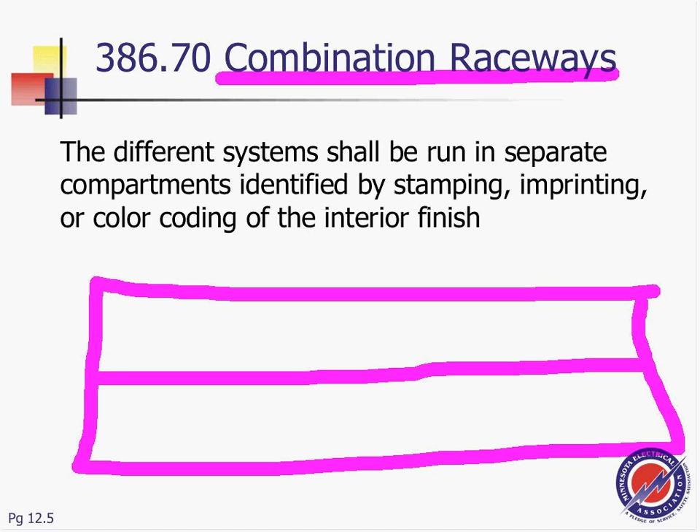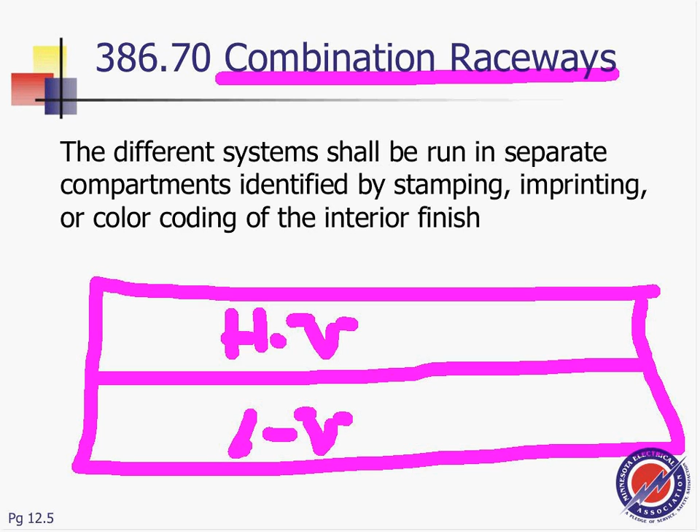Okay, that's basically for grounding. It's a listed combination raceway. Raceways also have an advantage, guys, where you can have a combo. I can have a raceway, surface-mounted raceway, big fat one like this, and I can cut it into two or multiple sections. We can have the high voltage section here, it has to be labeled, and the low voltage section here. So different systems should run in separate compartments.

If you have separate compartments designated, either you stamp them, imprint them, or color code them on the interior finish, so you have to make clear this is the low voltage section and this is the high voltage section. So the advantage, guys, for this type of system is instead of having two conduits, one to carry the control wires and one to carry the power for a process, you can use one of these where you put your control wires in one chamber and your power lines in another chamber.

Or you can use, if you're doing offices, you can put your high voltage - what is high voltage here, guys? 208, 120, 480, 277 if it's rated for it - then your cable TV and your phone and all this good stuff right at the bottom.

There, basically. Any questions about that separation before we move on? Any questions about combination raceways?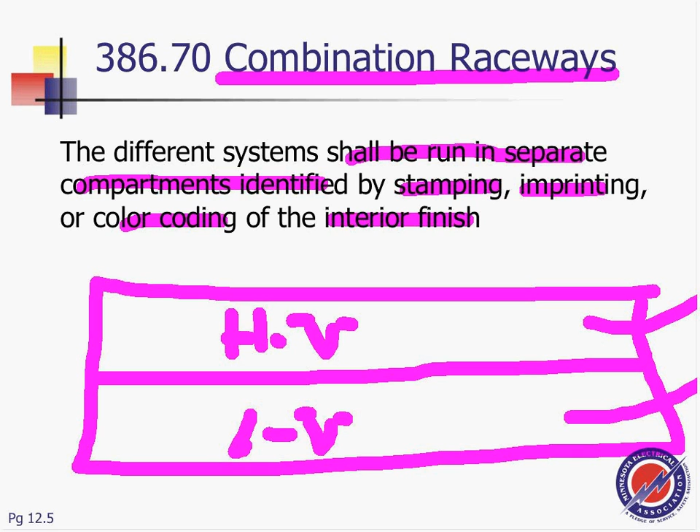Metal raceways shall be of such construction as will distinguish them from other raceways. Surface raceways and their elbows, couplings, and fittings shall be designed so that the sections can be electrically and mechanically coupled together and installed without subjecting the wires to abrasion. So you don't want to have sharp edges there, guys, as you pull or put your conductors in it.

And accessories of non-metallic material used on surface raceways shall be identified. Can I use a cover of non-metallic on a metallic surface raceway? Yes, if it's identified for the use. So your cover for the raceway can be metallic or non-metallic. Obviously, if it's non-metallic used with metallic, it has to be identified that it can be used with metallic.

As about this one, so that's basically a wireway. So before we get to that one, we talked about the difference between wireways and raceways. Any question about this? Any question about raceways, and a little bit about non-metallic raceways here? Now we'll switch into that one.

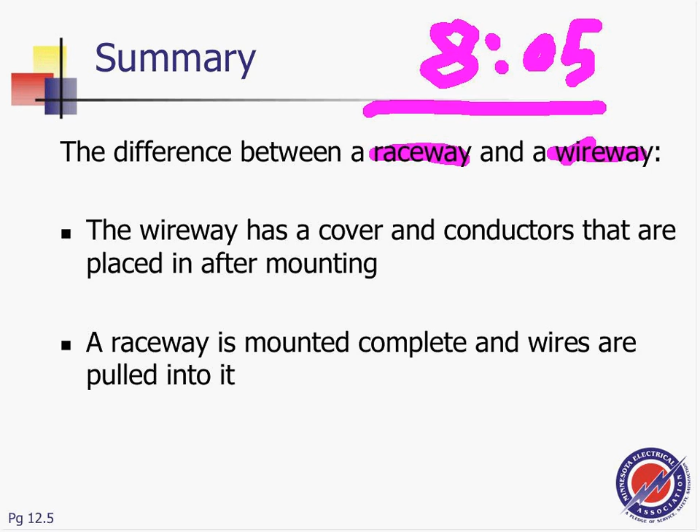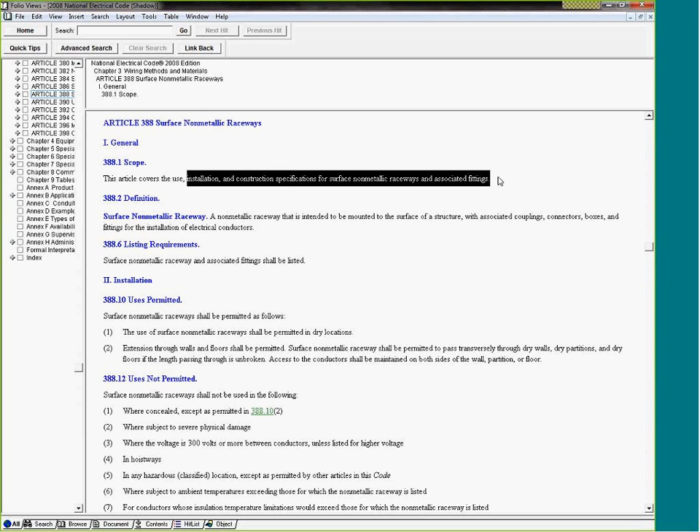Go to monitor 2, my friends, we're just going to review the non-metallic. We talked about the metallic wireways, guys, this is just a quick review of non-metallic. Same thing, the article covers installation, construction, and fittings. These are complete wiring systems, guys, except it's non-metallic, as we know. A non-metallic wireway is intended to mount to the surface or the structure with associated couplings, connectors, and boxes, and has its own fittings for installation of electrical conductors.

So this indicates that it has its own set of rules and combinations. Surface non-metallic raceways and associated fittings shall be listed. So friends, if you decided to go custom design yourself a mold, this is not permitted. You have to go to UL and get it listed. It's permitted - this is what I want to highlight.

Where can you use the non-metallic? Non-metallic shall be permitted in dry locations. Okay, use is permitted, use is not permitted. It's non-metallic raceways. So in dry locations, extension through walls is permitted. So they want you to use this one in dry locations, or through walls, you can put them through walls and ceilings as an unbroken section, permitted to pass through a dry wall through an unbroken section.

So it's not to be concealed. Those could be covered from three sides or pass through to go to the next side, as long as the part that passes through the wall does not have any opening in it. So by location, conduit still applies - where can't you use it? Concealed, except if it goes through a wall, or where there's severe physical damage.

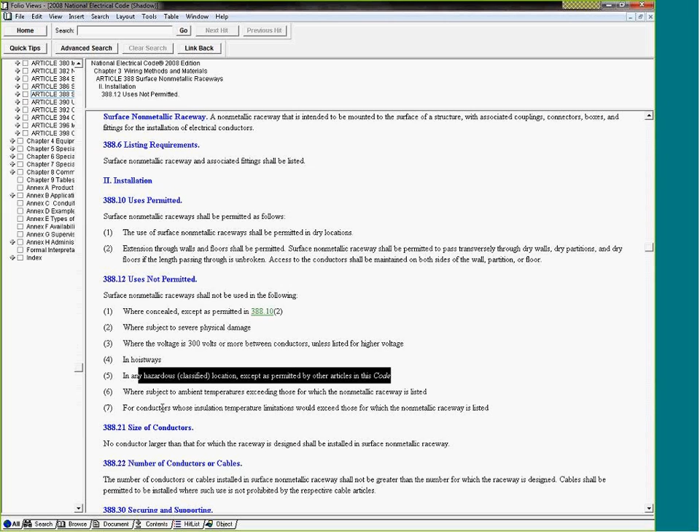Here's a limitation, guys - voltage, any other, the metallic again, unless listed for the voltage. So you can use it if you buy one rated for 480. Hazardous classification - no, unless it's permitted. Here's another limitation: if the ambient temperature or the conductor temperature rating is higher than what the raceway is rated for, you can't use it.

The conductor must be listed. The number of conductors or cables, like any other raceway, guys - we are not smart enough to know it, so what do we need to do? You have to go to the manufacturer. The number of conductors, which it's designed for, shall not be greater than the number for which the raceway is designed for. So we refer you to the manufacturer specification. Securing and supporting - we also have no idea how to secure it.

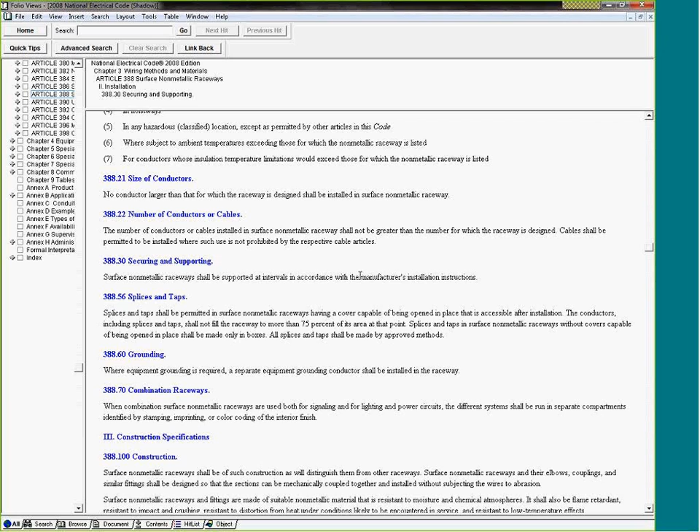So what do we refer you to? The manufacturer specification. As I said, if you apply the rule of 3-3 for metallic, it was 3 feet, 3 feet. 3 is like 3 between the support and 3 from every terminal. That will get you there.

That's what I do. Splices. Can I splice? No problem, as long as you have a cover capable of being removed. This is the key point. If you have a cover that's capable of being removed, so you can have access to the splice, no problem. Do not make the splice fill more than 75% of the conduit, like any other conduit or raceway. This is a non-metallic conduit, guys.

So what do you expect to have? If equipment grounding conductor is needed, 99.9% of the time, you need to pull an equipment grounding conductor.

Combination raceways. Can you have lighting and power and low voltage system? No problem. There's the signal and low voltage system. You need to do the same thing like the high voltage, guys. You need to separate them, and for average Joe like Chad, you need to print on them, stamp them, imprint on them, code them, so people do not install Cat5 with lighting and power circuits.

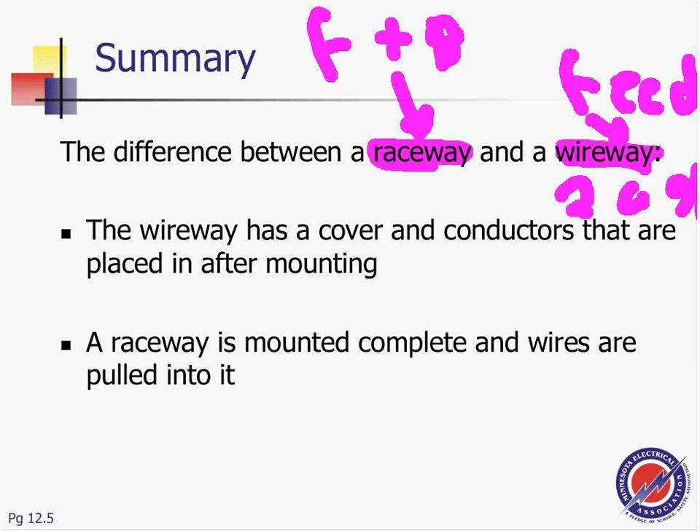We talked about the limitation, guys, of the wireways. The limitation of the wireways is the 20% fill. You can't fill it more than 20%. Raceways, no problem, you can fill a raceway higher. Raceways advantage, you can have a low voltage section and a high voltage section. For the most part, wireways come with one section. While the cover and conductors that are placed in it, so as the raceway.

The raceway can get them with a cover. When it is complete and wires are pulled into it, you can pull the wire into the raceway, or you can put the wires in the raceway and cover it with a removable cover. That's the advantage of a raceway too, as well as a wireway. So that's basically a few things, guys, about them. Any questions, any comments, guys, about the raceways, wireways?

I emphasize, when I see a wireway, it always comes to my mind: take a bunch of circuits from a panel, split them, use it as a raceway or a J-box, and feed multiple motors. That's one thing that always comes to my mind. Or take a feeder, split it, and tap that feeder to go feed multiple other feeders and so forth. This way, you can feed a switch, receptacle, anything from it.

Metallic, the key point guys, for the most part the major difference is corrosion. Some non-metallic ones, they don't want you to use it in other than dry locations. But for the rest, non-metallic is a good application for a corrosive environment.

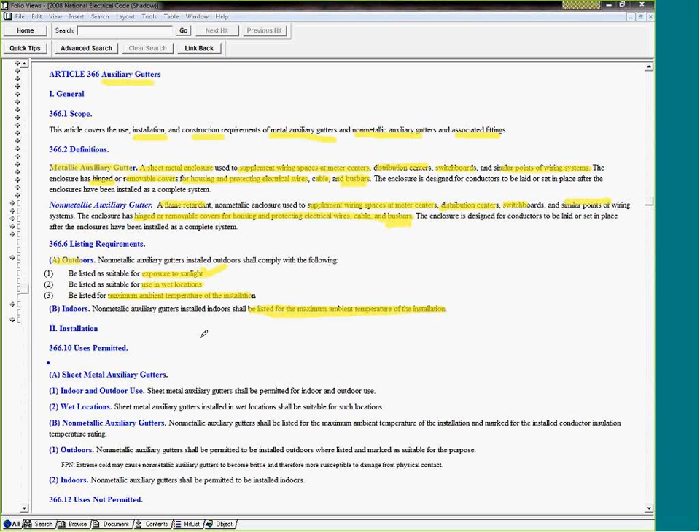The installed outdoor gutter shall comply with the following: it shall be listed as suitable for exposure to the sun, listed suitable for use in wet locations, and listed for the maximum ambient temperature of installation. If it's indoor, it shall be listed for the maximum temperature at which you can install it. That's basically the listing requirement for non-metallic gutters.

If installed, any question about this? So it's very clear, it's really not a wiring system, it's an enclosure. So the gutter is an enclosure. Any question, guys? Let me know over chat so I can make sure I didn't put you to sleep.

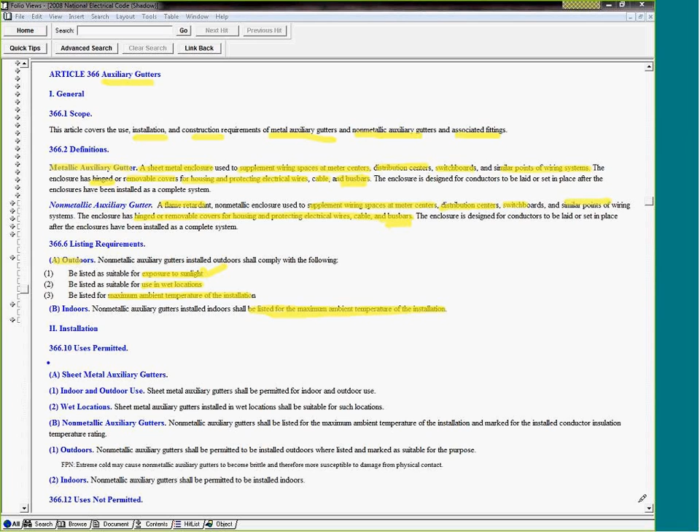Okay, let me just grab my notes. Initial use is permitted, so let's look at the sheet metal one. Where can you use it? Indoor and outdoor shall be permitted for indoor-outdoor use, no problem. In a wet location, if the gutter is installed there, it shall be suitable for wet location, so you need a NEMA rating or something to cover that.

For non-metallic ones, no problem, they must be listed for the maximum ambient temperature that's going to be encountered. If it's outdoor, it shall be permitted to be installed outdoor and listed as suitable for that purpose. If it's indoor, it shall be permitted to be installed indoor. So outdoors, guys, no problem, but they have to be listed if they're outdoor, both of them.

You are not permitted to enclose switches. Here's what they don't want you to do: they don't want my friend Dan to make that gutter into a panel. They don't want you to enclose switches, protective devices, appliances, or equipment. Might as well design yourself a switchboard then. It's meant to supplement the wiring system at panels, services, meters, and so forth.

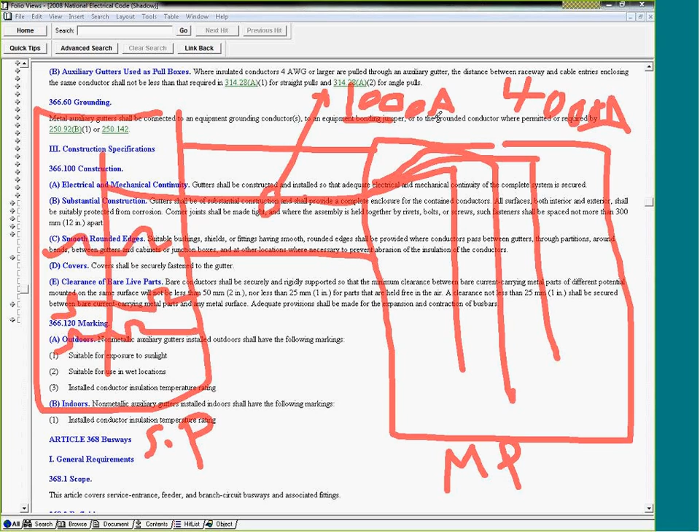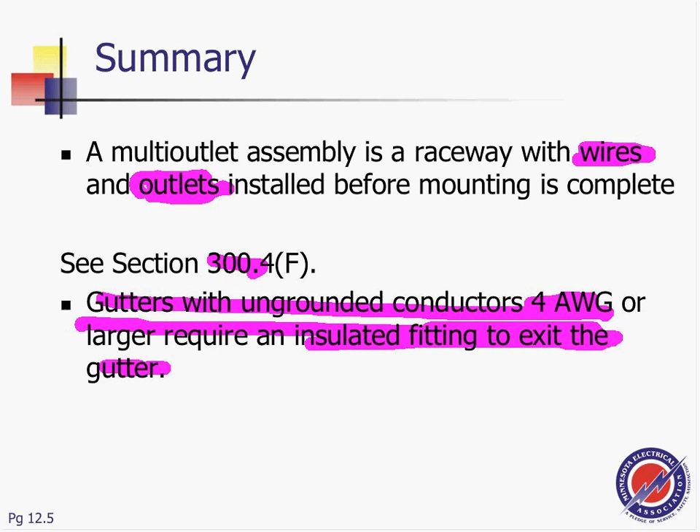Wiring here. So, clear it in terms of... back. We thought, guys, if it's number 4 or larger, gutter number 4 or larger requires insulating fittings. So we have insulating fittings for conductors number 4 or larger. Like conduits, they don't want you to damage the conductors. They don't want you to damage the conductors.

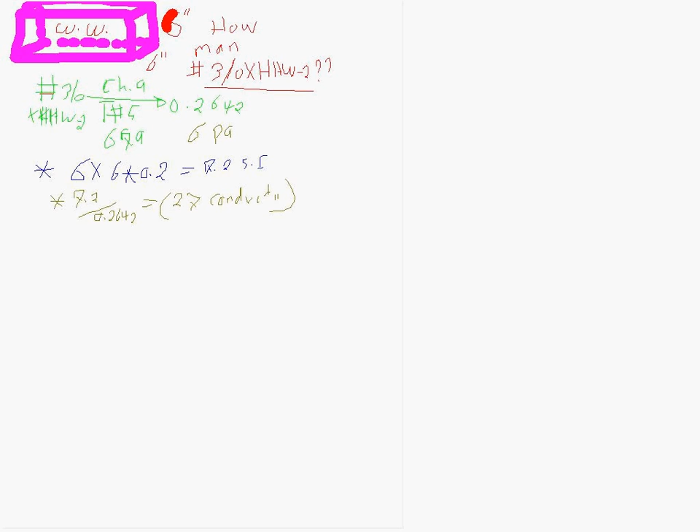So if you're in a commercial building with 3 aughts, say my 200 amp panels with 220, 225, I use 200 amp. So if you divide these by 4, say 4, that will get you 6 panels, 200 amp each, that you can pull all the conductors to feed.

4 conductors, 3 phase: hot, neutral, and ground. All 3, no derating with a neutral. So that's a lot of conduit to pull, and that's the alternative. As you see, my friend, you take all these conductors, 4 conductors, and pull them in a rigid, EMT, or PVC conduit.

So a Wireway can give you a lot of room to pull your conductors through. And the same calculation, guys, could apply for raceways.

If I stick with the raceway, so here's my Wireways. Let's look at a metallic surface raceway. If I want to pick a 0.53 by 0.75, that's a cross section area of my Wireway, I do the same calculation. Wires you can fill as much as the manufacturer tells you to, but if you take advantage of the no derating, you can't fill them more than that.

You can't go more than 20%. Conduits - thank you, Jesse. If you imagine pulling 6 conduits, 4 conductors, 3 aught each, the amount of bending conduits and the time involved, for certain applications it's better to pull them all in a Wireway or a raceway. Inside the right raceway, you can pull all these conductors in.